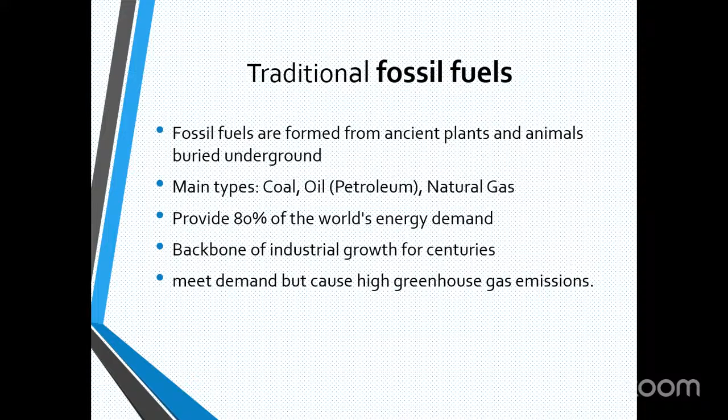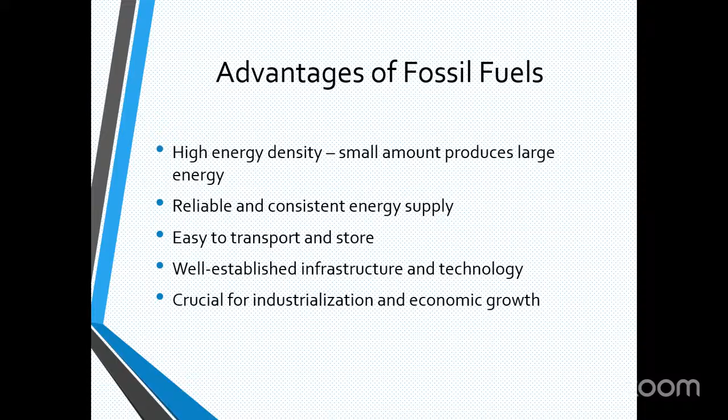Traditional fossil fuel has some advantages and disadvantages. Advantages are high energy density, reliable and consistent energy supply, easy to transport and store, well-established infrastructure and technology, and crucial for industrialization and economic growth.

But it has disadvantages too. The main disadvantages are greenhouse gas emissions, which create climate change and global warming and cause air pollution. It is also a non-renewable and depleting resource.

Currently we generate power with the help of coal, but in future it will be difficult to derive power from coal. So we have to switch over from the traditional method to renewable methods. Fossil fuel usage for power production also creates oil spills, mining hazards, and health issues.

The second factor is climate change. Due to melting ice, smokestacks, and rising temperatures, we face global warming, extreme weather, and rising sea levels. If temperatures rise, people use air conditioners more. Compared with previous years, air conditioner usage is higher now, and so we face more global warming.

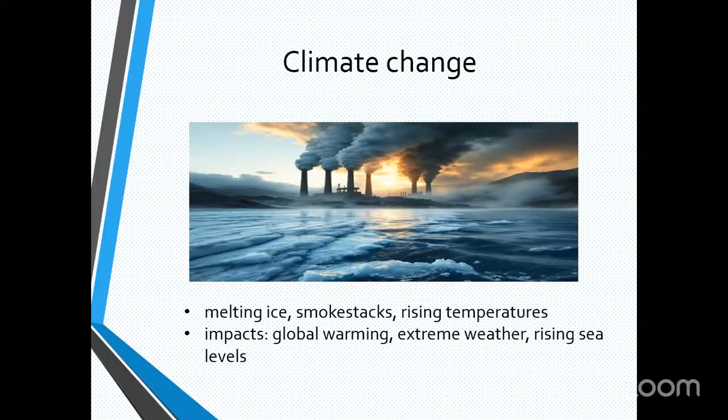We have to arrest these negative effects. So in order to meet global demand and also reduce the impact of climate change, we have to switch over from fossil fuel to other fuels.

What are the reasons to switch over from fossil fuels? First, environmental damage and climate change concerns. Rising global energy demand cannot be sustained by fossil fuels. There is increasing adoption of renewable energy alternatives, policies and global agreements pushing for low carbon energy, and a need for sustainable, clean and secure energy in future. For that reason, we are switching from traditional fossil fuel as a resource for power generation to renewable sources.

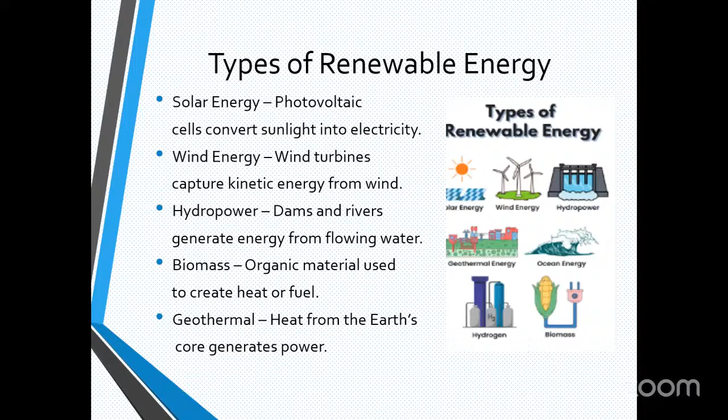This is the only possibility. But even though it is a solution, it has some challenges like variability, unpredictability, and integration issues. The types of renewable energies are solar, wind, hydro, biomass, and geothermal. I think you already know how power generation is done with the help of these technologies.

What are the advantages of renewable energy? Environmentally friendly, sustainable, abundant in nature, energy security, economic growth, and it supports rural and off-grid communities.

Challenges of renewable energy include intermittency, high initial capital cost, and energy storage technology still evolving. Integration with the existing grid is difficult because existing infrastructure was not suitable for integrating renewable energy in the olden days. Nowadays it is possible, but grid integration and infrastructure upgrades require advanced forecasting and smart management, along with land use and ecological concerns.

These renewable energies are applied in fields like industries, business, charging electric vehicles, water heating, integration into smart grids, and so on.

So renewable energy will meet the energy demand, but in today's scenario, most of it is used inefficiently—whatever energy is produced is not utilized efficiently. To make it efficient, we go for smart systems like artificial intelligence.

Artificial intelligence, with its ability to learn from data and predict outcomes, has emerged as a powerful tool to overcome these limitations and make renewable energy systems smarter and more efficient. So it is a growing field.

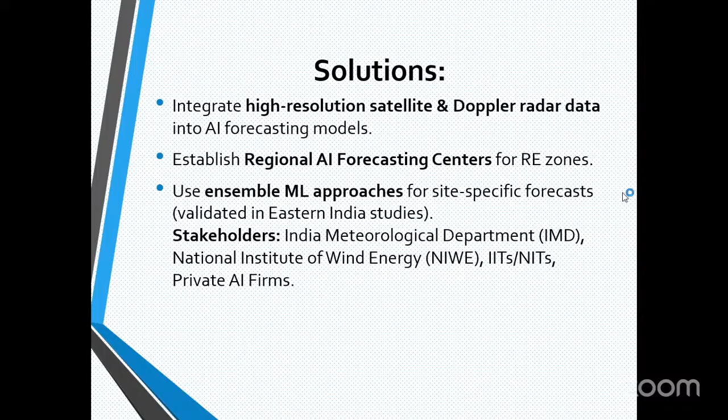Then cybersecurity risk: IoT sensor networks in AI enabled wind or solar farms increase the attack surface. The impact is cyber attacks can lead to generation loss or grid disturbance. As a real-time example, Indian energy firms have been warned about ransomware targeting SCADA systems. AI adds more networked points of vulnerability.

The solution for this is mandatory cyber audits for all grid connected AI systems, deploy AI-driven anomaly detection for SCADA or IoT networks, and align with CERT-In guidelines for critical infrastructure.

Then high AI compute energy demand: data centers powering AI require constant high electricity loads that exceed local renewable supply. The impact is the risk of AI adoption undermining India's renewable targets if powered by fossil-based backup.

The solution for this is to mandate renewable powered data centers, implement or install renewable power data centers, encourage AI model efficiency via lightweight machine learning and edge computing, and offer green data center incentives under MNRE's renewable energy development programs.

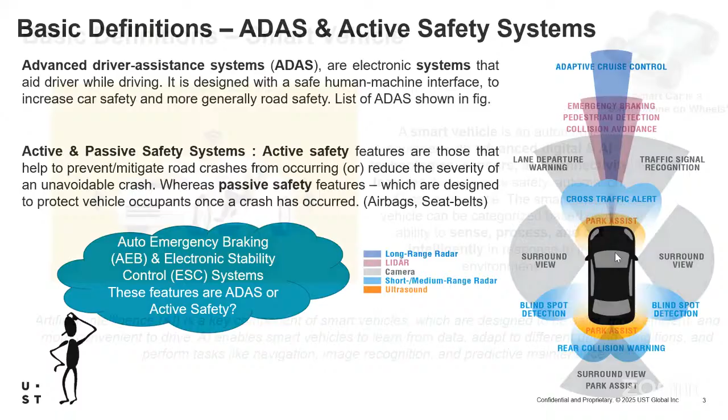So auto emergency braking is a very good feature which is also coming with these kinds of vehicles. More and more such features keep getting added to our vehicles, so that the vehicles are becoming more smart and more intelligent. And that is why we call these vehicles smart vehicles, right? Everybody has a smartphone. Why do we call it a smartphone instead of a mobile?

More and more artificial intelligence is penetrating into our phones and our mobiles. Hence there are advanced digital and AI technologies, more and more sensors getting into our mobile phones, and very good connectivity features. Earlier we talked about 2G, 3G, now 4G and 5G. In future, we have already started working on 6G, and there are pilot programs happening on that.

So connectivity features are also getting into these mobile networks, so that they can enhance the users' interaction with such mobiles, and users will also feel the good feel factor of having such advanced technologies. Now bring the same concept from a mobile to a vehicle. How good it will be if I have a vehicle which has all such features like advanced digital AI technologies.

It will also have mobile-like sensors like cameras, radars, and even laser-based sensors like lidars. And it will be able to have connectivity between one vehicle and another: vehicle to vehicle, vehicle to infrastructure, or even vehicle to pedestrian who is trying to cross the road. They can talk to the vehicle, or the vehicle will talk to them, and try to avoid collisions through infrastructure. Those are the technologies penetrating into these vehicles and making them more smart, with the focus of enhancing safety, automation, and user experience.

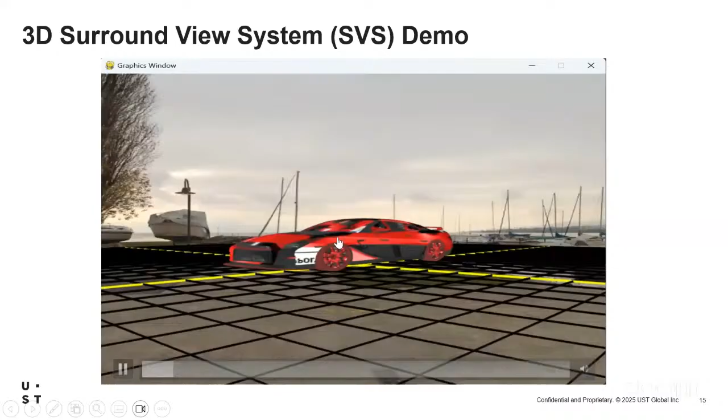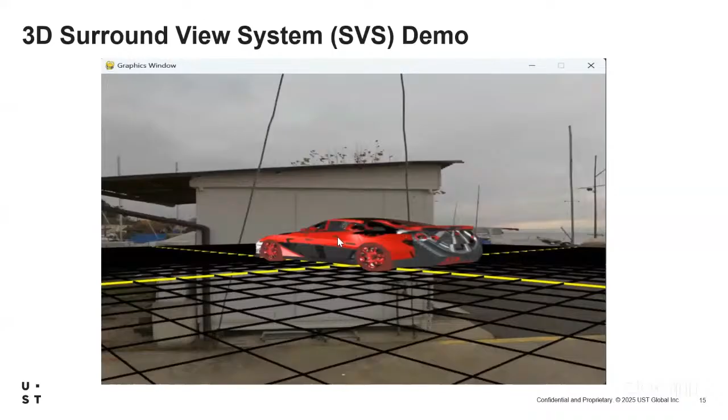Not only 2D, but you can also see there is a 3D surround view system where you can see entirely, not just from the top view, but from the side views also. You can rotate the entire 360 degrees of this vehicle, and you can also focus on which particular location you want to see the vehicle from. So that's the way our 3D surround systems will also be helpful.

There are other applications, as I talked about already, something called a driver monitoring system. It monitors the drivers and their eyes, and even their mouth. It can also tell whether you're yawning or you're about to sleep or you're drowsy. The key takeaway here is how AI is penetrating such applications, and trying to give more and more such alerts to the drivers if they are sleepy.

And it's not only giving alerts, it can also take control and bring the vehicle to a safe stop if the driver is sleeping, right? And not only sleeping, but if you have Ola or Uber kind of drivers, the fleet owners can get data on what they are doing, whether this guy is smoking or drinking, or eating while driving, or using mobile phones, whether he's wearing a seatbelt or not.

So those are all the additional features which can be found out by using camera-based perception when you fit these cameras into your vehicle, and it puts all this data into the cloud, so that if an accident happens, whose mistake it is can easily be identified using the previous data, right?

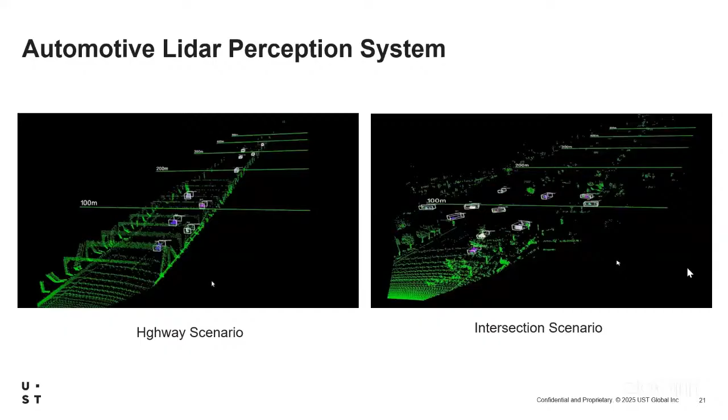There are other sensors also getting used in automotive, and in other areas too, which are called lidars. You can see a highway where you want to see the traffic, up to say 200, 300, 400 meters, right? A lidar is kept on a pole, and it keeps monitoring how many vehicles are going. It will give you the traffic density in that particular zone for outgoing as well as incoming vehicles, right? And it also classifies those objects, not only cars, but also trucks or buses; even two-wheelers can be detected.

And these lines are basically their tracks. That means how they have been moving for the past 10 seconds. This is the track of that particular object, right? So one can identify the behaviors of these vehicles, whether he's driving okay or driving in a crisscross kind of way. Such patterns can also be found by using these AI-based applications, right?

Now, we'll also touch upon some of the sensors which are getting used. As I talked about, there are so many camera sensors you can see in recent vehicles.

There are rear camera sensors getting used in vehicles, as well as radars and lidars, and each and every sensor has its own purpose, right? Maybe the camera will not be working in a rainy season, or maybe in a smoky season. Some of you might have observed fog in Delhi. Our north regions will have fog, and hence cameras will not be able, even a human cannot be able, to see what's there in the front.

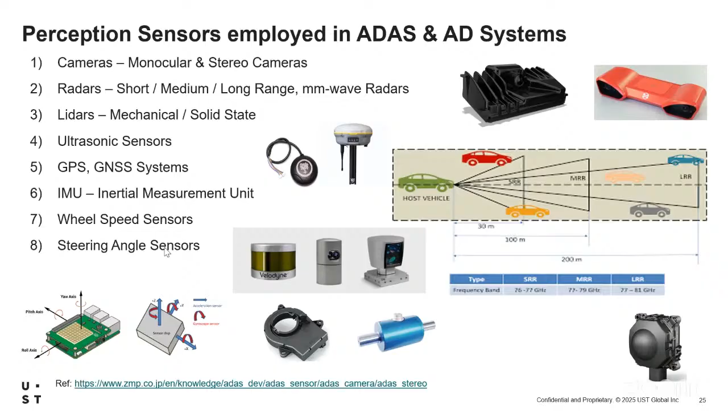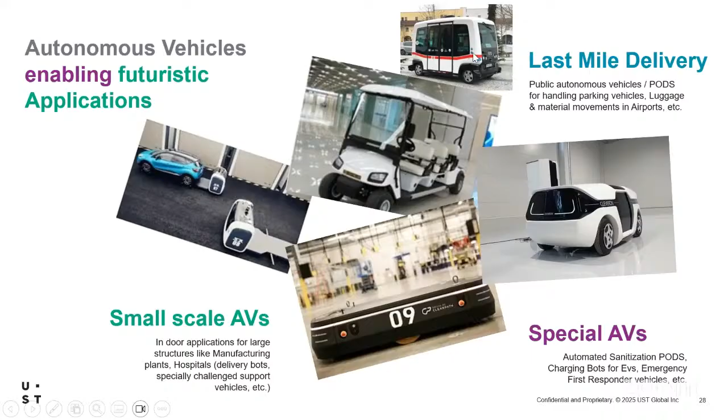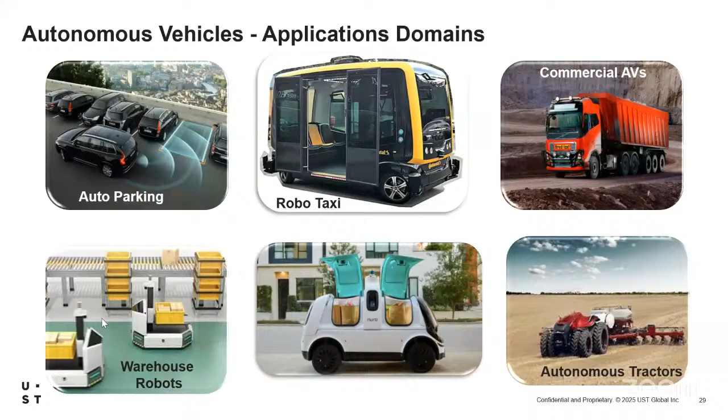So likewise, there are many such kinds of vehicles you could see being applied in the context of self-driving or autonomous vehicles without any human intervention. It's not necessarily that only humans have to be transported. Even groceries or any medical items can be transported. Even warehouse robots are transporting packages from one location to another. So everywhere, smartness is coming into these vehicles with the assistance of AI, right? More and more sensors, more and more AI-based algorithms have penetrated, and hence there are a lot of good examples you could see, from autonomous tractors to commercial vehicles.

What are those key elements? The key element is, we try to give human level perception. It means when you drive, you see the world through your eyes. But here we are replacing the human eyes by cameras, which will be fitted in the vehicles, so that the cameras can see what is there around. It's not only cameras, but also radars and lidars, which is a little bit above human intelligence.

And then it tries to identify the controls, connectivity, and it tries to do the data logging and diagnostics, so that it can even localize by itself where exactly you are on the road, where exactly you are on the map. And it can also have the capability of doing calibrations and self-calibration configurations.

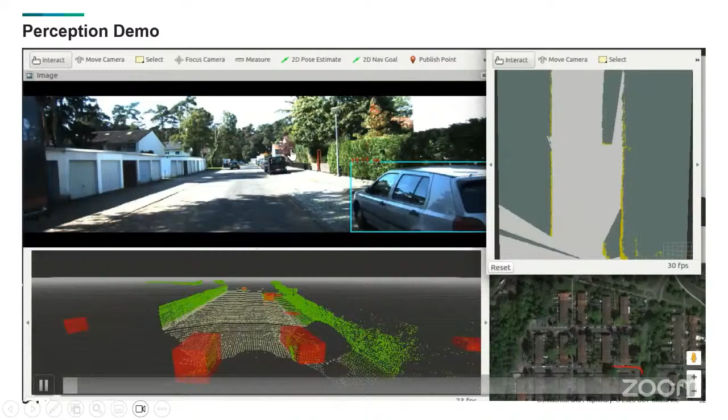So you can see some of these videos where there are camera-based perceptions where AI models are detecting different objects. And then this is basically the LiDAR, which is in 3D. It detects all the objects and puts a bounding box. And these white color spaces are the top view. If you see, this is the road which has free space. So this white color space is the free space available, so that you can plan the vehicle driving autonomously, self-driving, without any human. It can take all the control actions inside this.

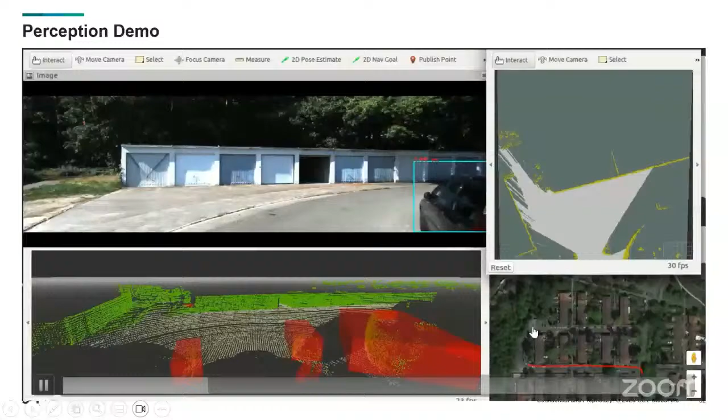So this is basically the perception task, coming from different sensors. And this is another good AI-based model which can be adaptively used for every application. It can generate results like what is there around the vehicle, is there any vehicle in the front, is there any alternative path for you to cross the road, or you want to take a left or right to the other lane. And there is a color change happening immediately the moment you change. This becomes your lane, and the other lane will become an alternative drivable region, right?

It's not only the on-road objects, but it can also see many other objects on the sides of the road, right? It can detect pedestrians, it can detect even other buildings, or it can even detect traffic signs and traffic poles.

So everything can be detected by using a single model. And once this kind of intelligence is available by using an AI, you can apply that for any kind of controls in your applications, right? So this is a quick application which I wanted to show before even getting into a vehicle.

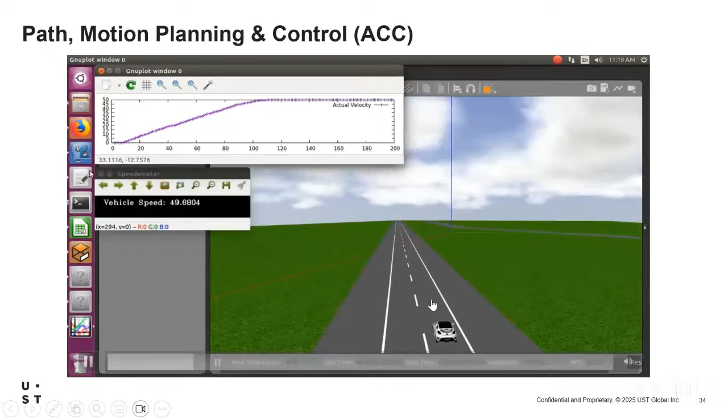We do a lot of simulations. It's an open source simulator. One can use that for controlling the vehicle and checking how well our adaptive cruise controls are actually working, right? When you set the speed of say 50 kilometers per hour, the vehicle will keep maintaining that 50 kilometers per hour, right? But at the same time, if I'm having a vehicle which is moving at the same 50 kilometers per hour and maintaining that, but the scenario changes, right?

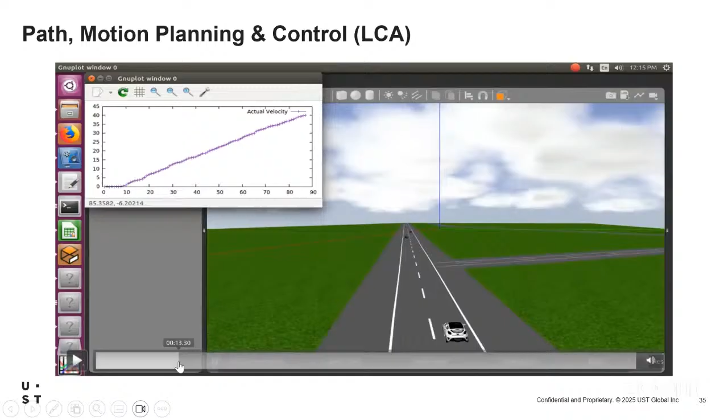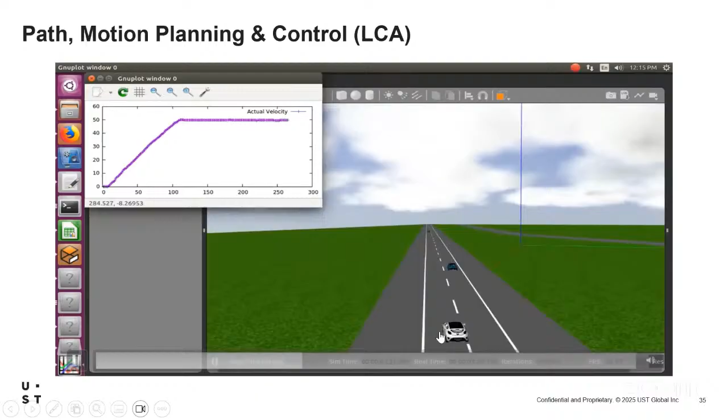It identifies that there are multiple other vehicles also moving on the road. So what it will try to do is identify whether I can directly go there, or whether there is any space available. I'll do a lane change, right? So that I'll not go and hit, because my speed is a little bit more than this guy's speed. So this vehicle will take the decision of lane changing and then keep going in that way.

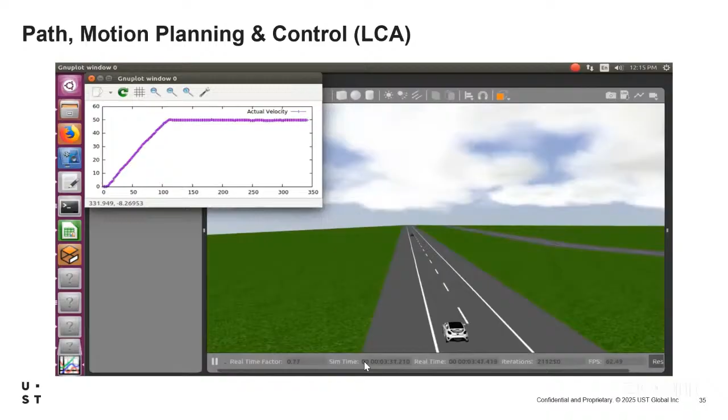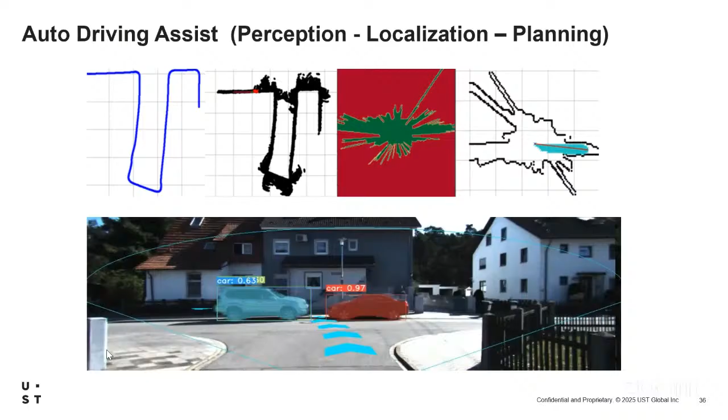So it has level 2 kind of automation and that kind of intelligence which is available in these kinds of systems, right? These are all simulations, but taking it into the real world now, give this kind of guidance to the drivers. Even though you are driving, I will start giving you such guidance, from home to office, office to home, or college to home, right? These indications will be available for you, so that even if you miss your path, it will give you an alternative path to reach your destination.

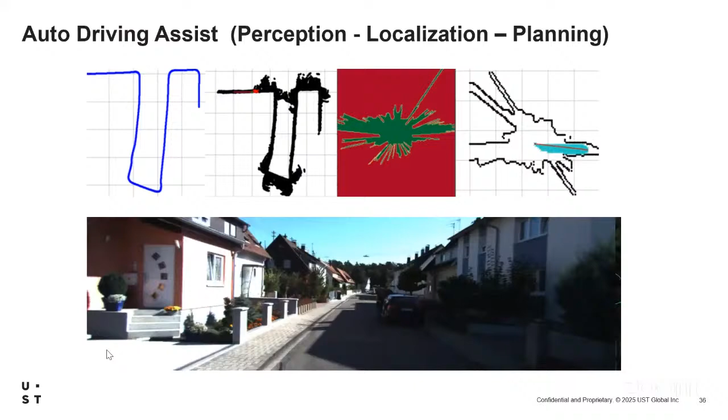If you're exploring a new city or a new region, these map based applications will be able to give you not only the indications, but also display them in your vehicle itself, in the front, right? So that's one of the applications of how perception and controls are getting applied. And as I talked about, there are multiple such sensor systems.

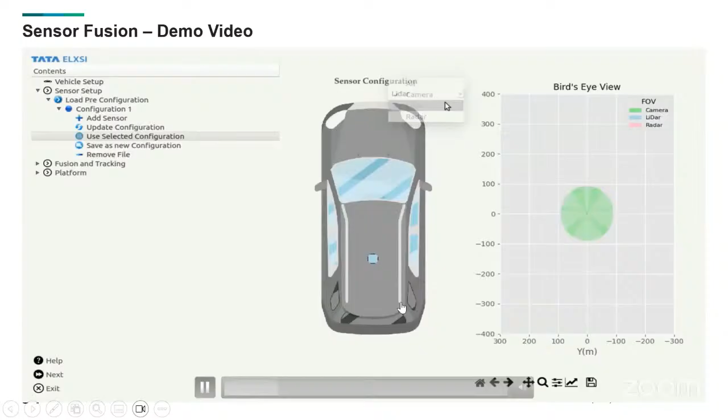Since I worked with Tata Elxsi, it's my privilege to use this particular video, where you could see that sensor fusion is also nowadays getting familiar in multi-sensor networks. So you have cameras, you have radars, lidars, all these different systems providing the information, right? So now if I wanted to do a sensor fusion of such inputs, right?

There are algorithms like Kalman filters, particle filters, even data associations using k-nearest neighbor algorithms, so that you are able to associate different detections coming from cameras, radars, and lidars, and then collectively give the entire fused output. That is what I'm trying to show here, right?

So you are able to see there is a pedestrian here, and this pedestrian is detected by the camera as well as the radar, and this pedestrian is moving with this meters per second as a velocity, whether he's coming towards you or going out. There is one region which is a shadowed region, right? That is nothing but the direction it's coming towards, right? You could see that there is a truck here.

If I move this video, there is a truck which is getting identified by the radar and lidar, which is what you can evidently see in this camera. And it is going in the direction opposite to your movement. So this is the face of the truck, and it moves in that direction. It is being detected by the cameras, radars and lidars in that case. Okay, so this is how sensor fusion technology is also getting more and more advanced with the penetration of AI based techniques.

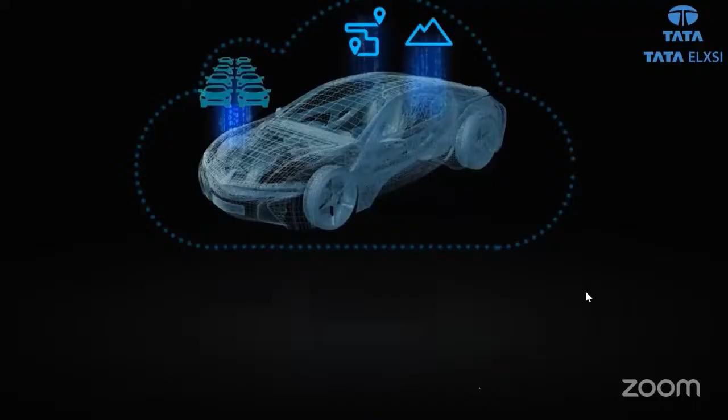Again, there are a couple of videos which are on the range estimation features. Range estimation is one such feature. User drives EV, enabled with a feature, and sets the destination on navigation HMI. The vehicle data is uploaded to cloud. The cloud microservice fetches the route information and terrain information. Traffic intensity on the selected route is obtained from Map API. Weather information is fetched from Open Weather Services.

Results from range estimation feature are displayed in HMI. These results help the user to evaluate whether the destination can be reached with the available charge under current traffic and weather conditions. A dashboard is used as a web or mobile application to display the output of the range estimation model. It displays the variation of estimated parameters along the entire course of the journey for user reference.

Okay, so there are a couple of other videos which also talk about different digital twin applications. Last but not the least, connected, autonomous, shared mobility, all these different technologies are bringing smartness into our vehicle, and hence we coined the word called CASE. C is for connected, A is for autonomous, S for shared mobility, and E is for the electric mobility perspective, right?

So a little bit I have mentioned about Gen AI. So I'll close my discussion here with a little introduction to Gen AI. You have already seen the subset diagrams: what is AI, ML, deep learning and Gen AI. Now inside Gen AI, what's happening? You have foundation models, you are talking about large language models, and then ChatGPT is your interface through which you can talk to these LLMs to get answers to your queries, right?